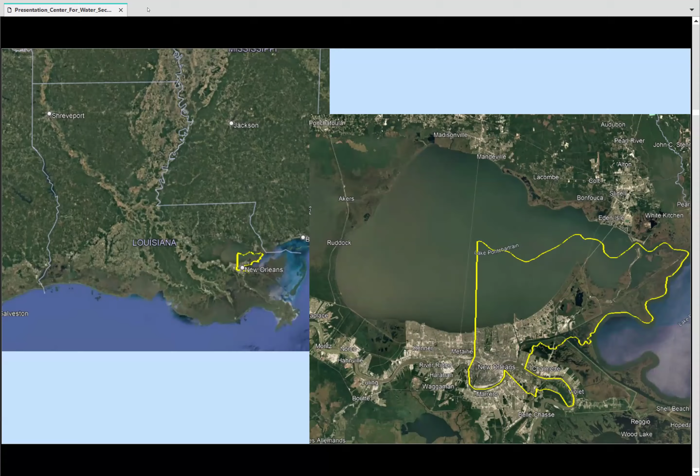The regional watershed that we focus on and contribute to is the Lake Pontchartrain Basin, seen here. I specify that we contribute to it because we don't receive much from it, as the hurricane protection system that the Army Corps of Engineers constructed after Katrina completely levees the greater New Orleans area from receiving waters, as shown here.

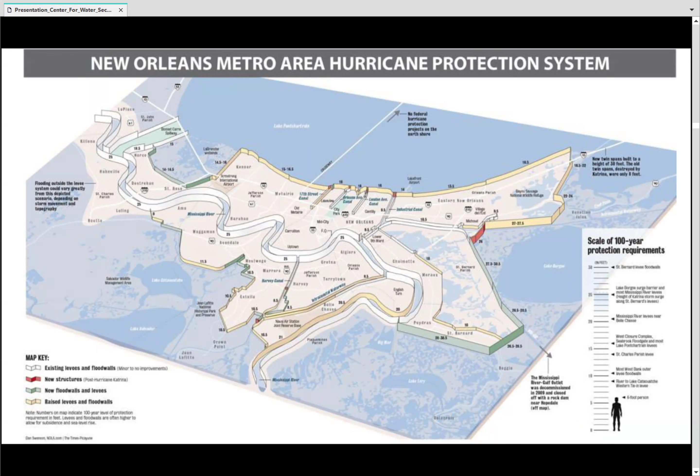Let's back up for a second and talk about how we got here. For thousands of years prior to and during the initial years of European settlement, several Native American tribes lived along the areas of high ground on the natural levees of the river, and also along the geological ridges of the distributaries.

In 1718, the French built a permanent settlement on the high ground adjacent to the Mississippi River, only 14 feet above sea level. As a result, the city was subject to flooding from the Mississippi River, from the lake, and also just rain in general.

This is a comparison—that red rectangle is the French Quarter, as we call it, referring to that same 4 by 11 block initial settlement, and this is how it looks compared to the current built environment.

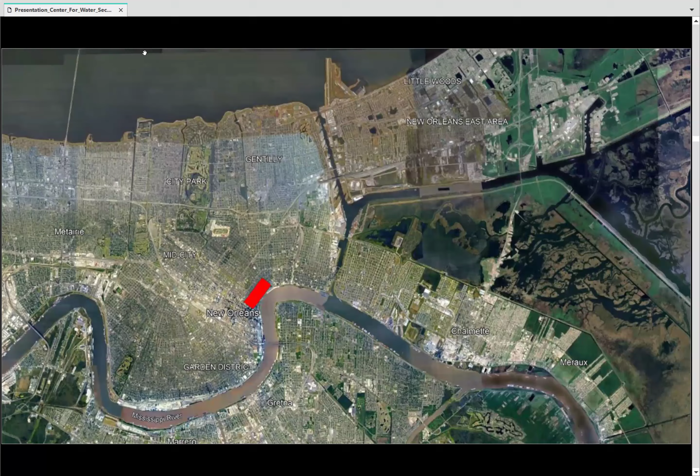An 1890 map of New Orleans from an LSU professor compares where they had settled, only about 150 years after that first settlement. You'll see that they were still just following what the Native Americans did, following that high ground where they could, to make a life for themselves.

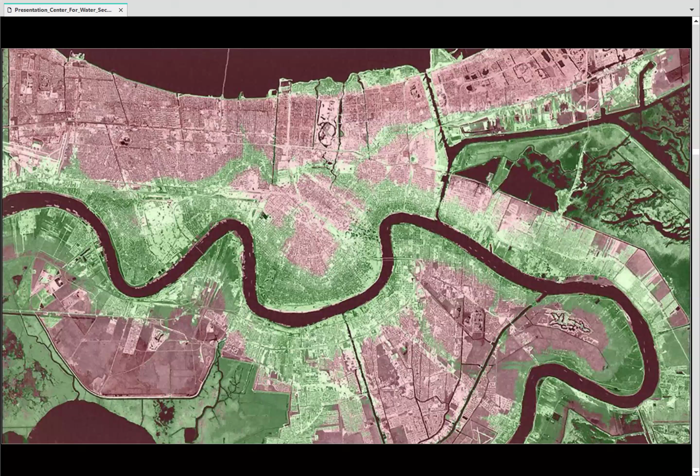This is an exaggerated cross section that shows how the elevation of the city has settled. The river is naturally higher than the lake to the north, which is why all of our canals lead to the lake in the north. This graphic was created a few years ago when the river was high and we were expecting a tropical storm, but I use this to show where the sea level line is compared to the populated areas of the city. That's why we're protected by these man-made levees, because we live in a bowl.

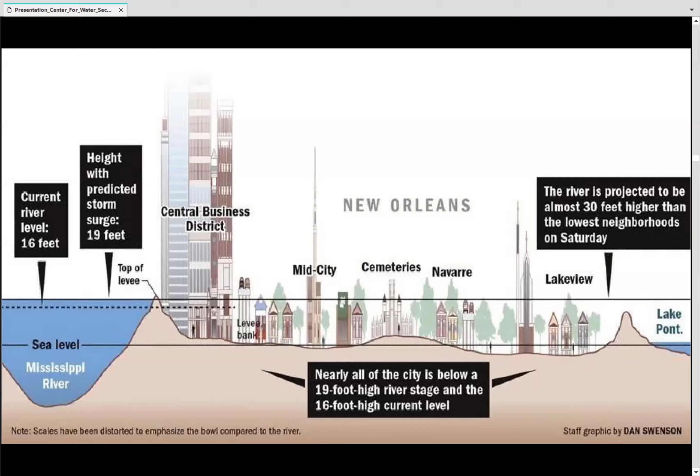Back in 1870, before all that, a surveyor from New Orleans warned that heavy storms are going to push that storm surge back from the lake up the canals into the city, because we have no way to stop them now that we've opened up these passageways.

They created a master drainage plan in 1896 and created the Sewerage and Water Board utility. In 1899, they hired a engineering graduate who created the pumps still used today. His name is Baldwin Wood. It's a wood screw pump. They installed 11 of them in 1915 for a total cost of $159,000, which would be about $5 million today, and they're still in use.

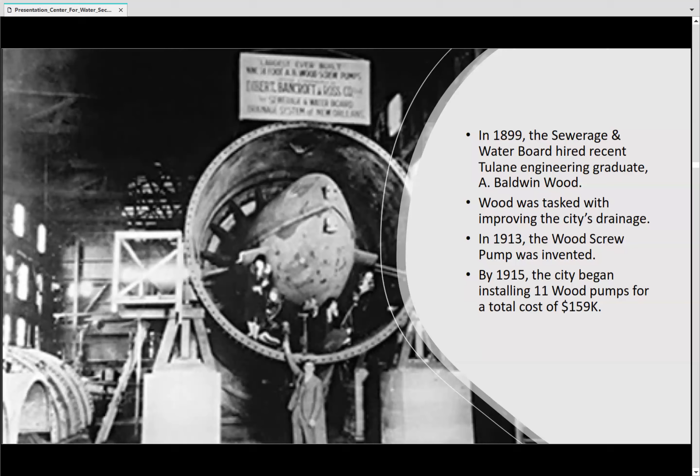These pumps are pretty simple. They use a powerful siphon action to lift the water into the drainage canals, where it flows by gravity further on to Lake Pontchartrain. So it's really just a straw with a fan in the middle. You need to have both sides submerged to make it work, and it keeps going until the water gets too low.

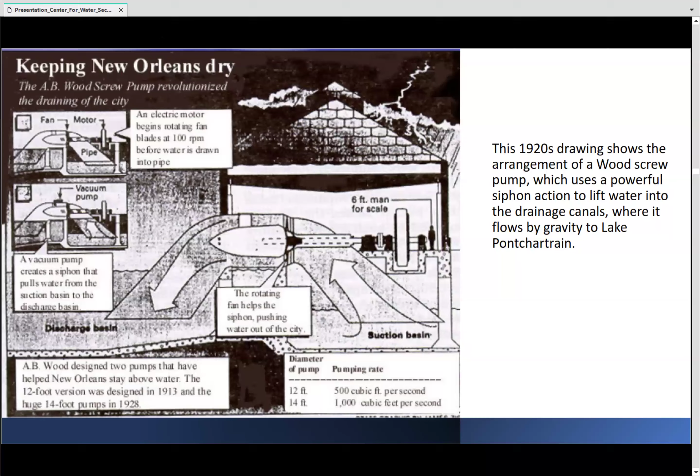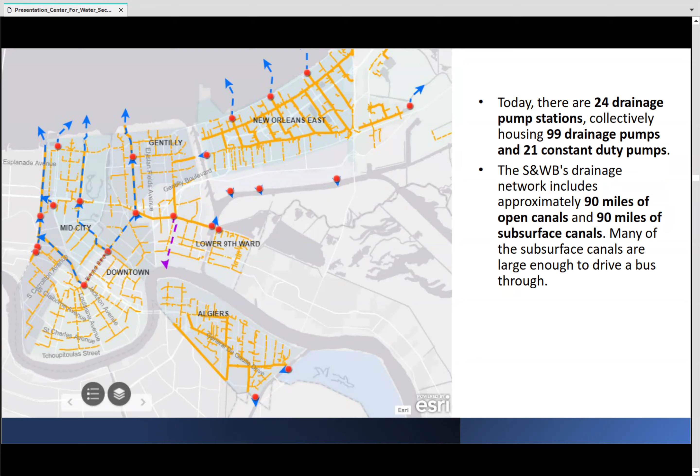Today, there are 24 drainage pump stations collectively housing 99 of those pumps. Our network includes 90 miles of open canals and 90 miles of subsurface canals, many of which are large enough to drive a bus through.

Now that we have a base understanding of how we engineered gray infrastructure to inhabit New Orleans, let's talk about nature-based solutions or approaches to stormwater management. Green infrastructure is an approach to stormwater management that mimics nature by soaking up and storing water using vegetation, soils, and natural processes to create a healthier urban environment. We know we need to work with nature, not against it, to live with water.

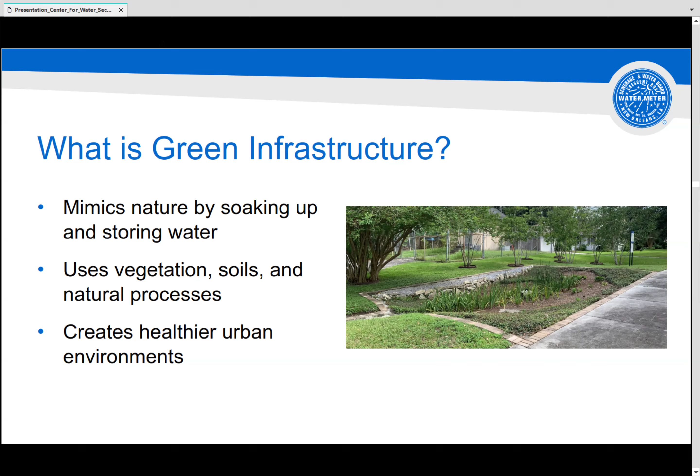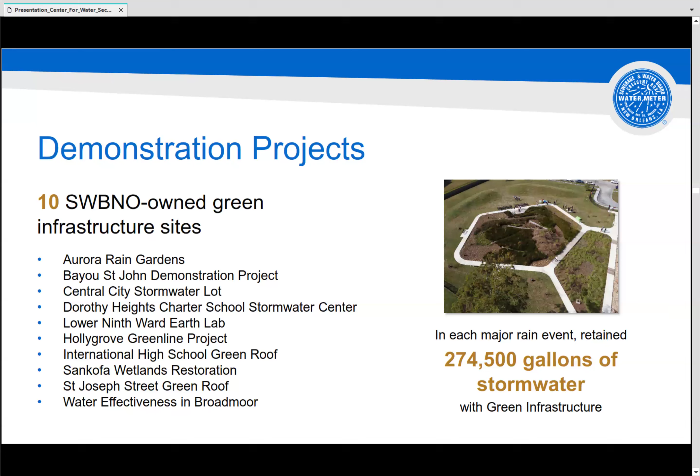Along with the city—we're separate from the city as the water utility—we've been funding green infrastructure projects in flood-prone areas. With the amount of rain we get, we will always need canals and pumps, but green infrastructure is an important piece of the puzzle.

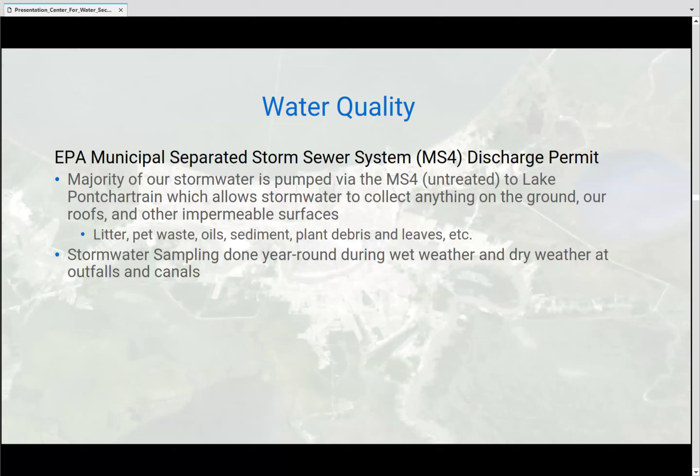One of the key components of why we care about green infrastructure is improving our water quality, as we are the holder of our EPA MS4 stormwater permit. This is a major problem in New Orleans. We are unable to treat our stormwater through our sewer system—they're completely separate systems. We get on average 68 inches of water per year, which would completely overwhelm our sewer system. But by using green infrastructure and retaining rainfall where it lands, it allows us to naturally reduce flooding and improve the water quality at the same time for our surrounding water bodies.

Okay, the real reason I'm presenting: one of the most successful ways to implement decentralized green infrastructure where it is most needed, regardless if it resides on private or public property, is to support the work of our community-based organizations that are already doing it. CBOs in New Orleans run deep, and they are fiercely passionate about the city and their neighborhoods. They know every puddle and how the water flows or doesn't flow.

Two CBOs that sought out relationships with our water utility are Healthy Community Services and Groundwork New Orleans. Dr. Angela Chalk with HCS forged a partnership with Sewerage and Water Board in 2022, with backing of a grant from the River Network, to build trust between utilities and CBOs.

That work included tree planting with Groundwork, trash boom installation with Osprey in one of our canals in this area, and also outreach in the community.

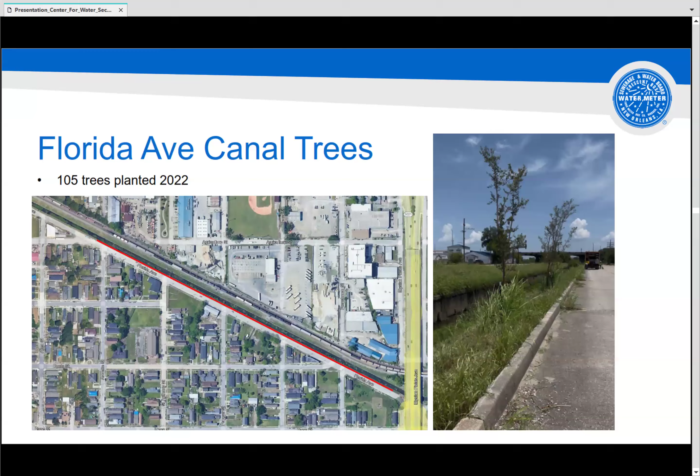Building on our work, I submitted an application to the Green Infrastructure Leadership Exchange for their re-grant in 2023, to continue that work with the same parties in the same areas.

Halfway through our grant—this is the amount of trees we got planted by that point—a rogue employee of my support services crew had mowed down 100 of the trees Angela and I had planted three years prior, out of maintenance frustration. The area in question is 2,000 linear feet on a 10-foot wide, steep-slope canal bank, which is classically maintained with an arm mower on a tractor. We realized we had focused our outreach on the community and skipped over a critical group: our own staff.

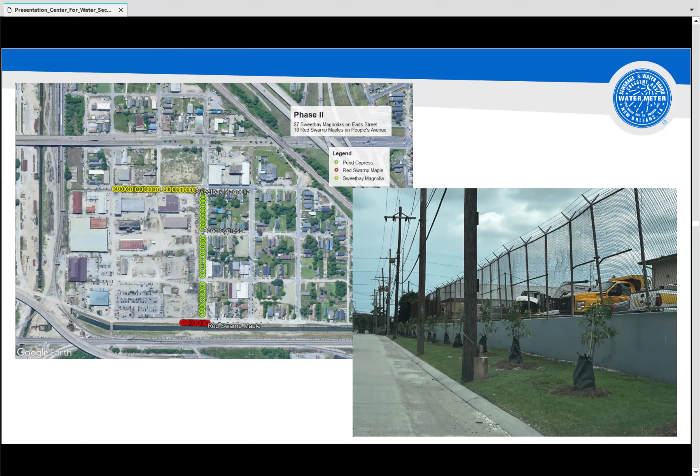Dr. Chalk learned of the event as it was happening because she lives in that neighborhood. A distraught neighbor sounded an alarm, called and ran over to her house. The phone tree was quick, and the lead supervisor I communicate with regretfully confirmed that it was our employee who had cut down those trees.

Dr. Chalk had many avenues available to her in that moment. The media and the community hold little grace for our water utility and would have loved to blow up that story. But instead, she called the people to action who could make a meaningful change, and leveraged the catastrophe into new opportunities. She did this because of the relationship we had built personally, and the wisdom that public health was at the root of this.

Within a week—this happened on a Monday—by Friday she had brought 6 agencies together in person to acknowledge the situation and present next steps: tree training for employees, policies, and replanting with a low-maintenance solution, making sure we're learning from our own outreach as well.

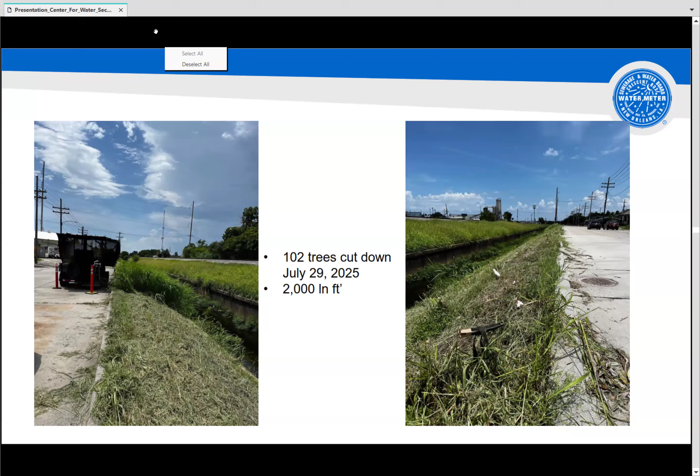Next slide. I reached out to Barbara right after that with a request to use the remaining grant funds to pursue the current needs, and I was met with an easy yes: document it.

We'll present it multiple times. We'll learn from it. To date, we've trained 40 employees and are planning to capture 200 more from our biggest department next month. The training is a combination of understanding how the environment affects public health, the importance of urban

trees within that, how to plant them, how to prune them, how to dig around them, as well as stormwater BMPs, which are important during all of that work.

Next slide. The effort brings together the city's Parks and Parkways Department, our Environmental Affairs Department, and Healthy Community Services to present a well-rounded training that hopes to educate instead of reprimand. It has been well received, and all parties have learned multitudes about each other at each training, including ourselves.

Next slide. So next steps are to coordinate a prescribed burn training, which has gained traction among urban organizations that would like to pursue it, but has been difficult to find a trainer for because much of the state isn't lower marshland,

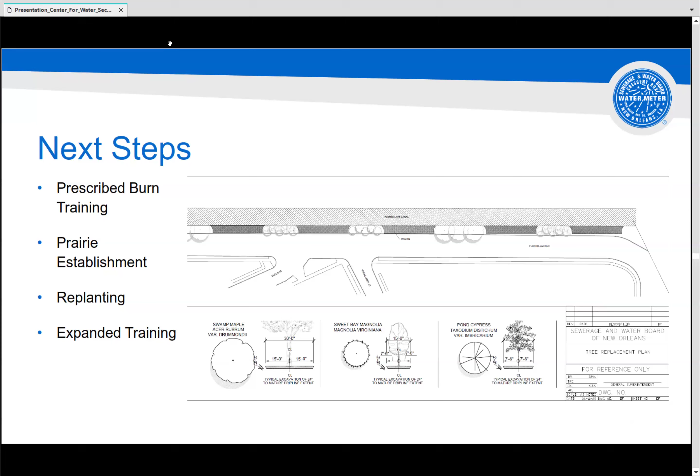That's all I got. Thank you.

Thank you, Grace. Next, I'll turn to Justin Reynolds from the city of Minneapolis.

Thanks, Barbara. Good afternoon, everyone. My name is Justin Reynolds, and I am the Green Infrastructure Coordinator at the City of Minneapolis.

And I'll be talking a little bit about how Minneapolis utilizes GSI to advance sustainability and what that looks like whenever we're implementing GSI on our public works projects.

Just a little about me. I've just been at the city of Minneapolis for a couple of years. And before that, I was doing consulting work as a civil engineer, doing a lot of green infrastructure work on the East Coast, in Philadelphia and New York City.

And yeah, originally from Kentucky, so I was in the Mississippi River Watershed, moved out of it for a little bit and decided to come back. Next slide.

So just to talk a little bit about why GSI matters in Minneapolis, we've had a pretty big increase in the amount of GSI that we've been implementing over the past few years, mostly as a result of policies that

support sustainability and climate resiliency. So there are a few policies that I wanted to highlight, and I'm going to go into a little more

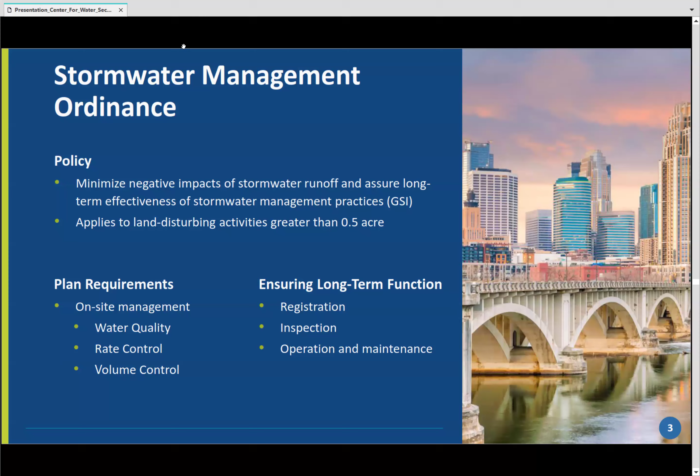So then these other two guiding policies, we've got Minneapolis 2040 and our transportation action plan. Minneapolis 2040 went into effect in January of 2020. I just wanted to mention that we have a few policies within there that support sustainability, including climate resilient communities, sustainable water system management, stormwater management, and integration of water management into development.

And then our transportation action plan went into effect December of 2020. This action plan guides a lot of the work that our transportation divisions within Public Works do. In this action plan, they've outlined a few design strategies for those projects, one being green the streets. So especially for projects that are required to meet our stormwater management ordinance, our transportation planners and engineers are very supportive of utilizing GSI to meet those multiple goals that they have.

So just as an example, they have a couple of actions in there. First one being build and maintain stormwater infrastructure into streets using features such as vegetation and bioswales to reduce runoff and treat water prior to entering waterways. Another one is adding greening elements to streetscapes to support the comfort and pleasure of people using the streets, as bikeway protection where appropriate, around transit stops and stations, and in high volume pedestrian areas.

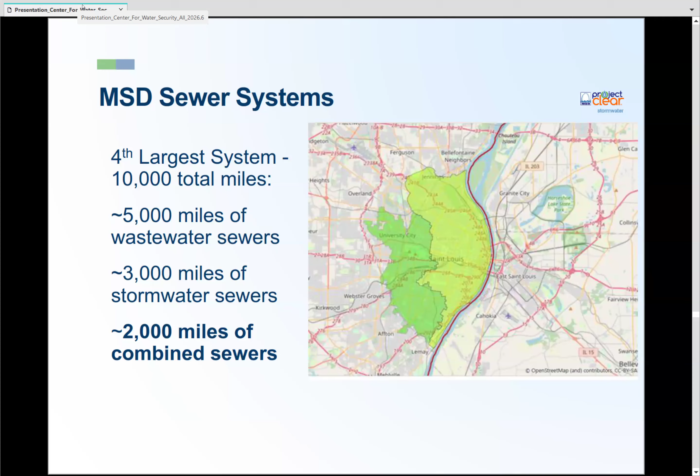Our funding comes from a consent decree to manage sanitary and combined sewer overflow. I showed the combined sewer area, and in case you're not familiar with what a combined sewer overflow is, in those older regions of the city, there was one sewer pipe that mostly conveyed the wastewater, but when it storms too much, it overflows, fills the capacity, and then breaks over that dam and flows into the Mississippi River. So we're trying to reduce that as much as possible through tunnels and green infrastructure.

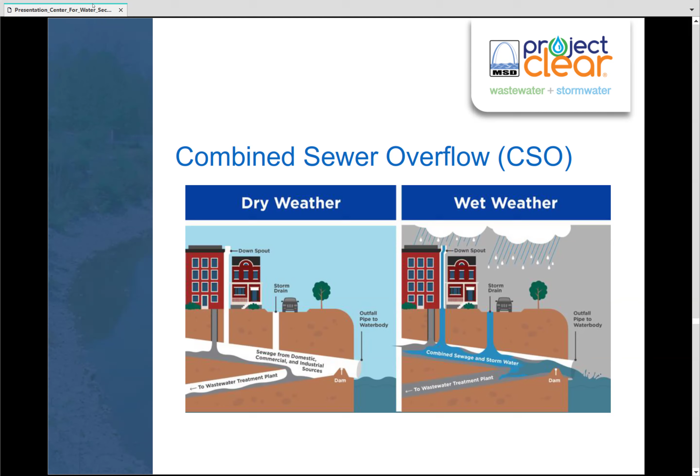Around 2011 is when we signed our consent decree with the EPA to reduce these overflows. They talked about investing $6 billion. At first they were just focusing on the Mississippi watershed combined sewer area, and it was agreed that we would spend $100 million of that on green infrastructure. Then in 2019, they also added the River Des Peres watershed. This is all water quality based and CSO reduction based. So now we have a $125 million budget to spend by the end of 2034 on green infrastructure.

At the beginning of the project, MSD built about 14 rain gardens and bioretention basins on vacant property that we could find within the city of St. Louis. But then it moved to more reimbursement based on private property. By the end of 2034, the total goal is to reduce the gallons going into the Mississippi by no less than 107 million gallons.

And then we also have our tunnel projects that will also capture more millions and billions of gallons. Okay, next slide, please.

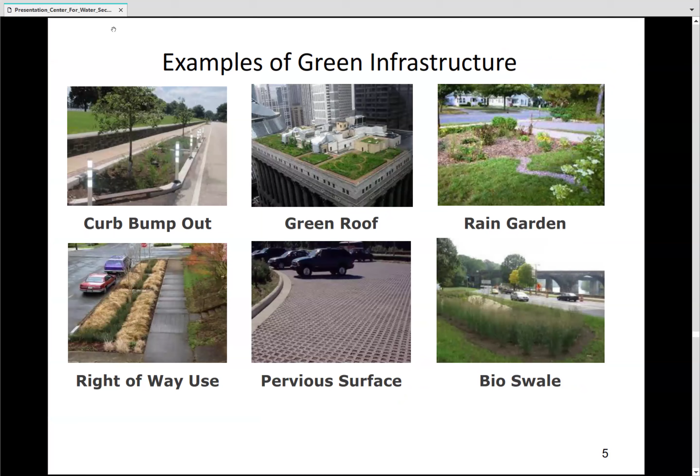So we already went through a lot of examples, but here's the slide that I usually use, examples of green infrastructure. Mostly we see rain gardens. Our grant does provide for green roofs or pervious surfaces or those curb bump outs that Justin showed as well.

One question that we get a lot is we cover wetlands and forest and stream restoration. Those I would consider green stormwater assets, but this grant doesn't just cover wetlands. It has to provide extra storage in those storm events. And then trees are helpful for managing stormwater, but our grant won't pay for just trees. It has to be in a bioretention basin or along with some other flood and landscaping management.

New Orleans is probably more porous, but we have a lot of clay soil in Missouri. So this is just going to depend on your city and organization and also your geology. But we always require a perforated under drain in our bioretention basins and some gravel. So they'll dig out some of the clay and existing soil and put in these gravel beds, bioretention soil, and then the under drain. That way you're not getting standing water or pooling or causing any mosquito problems. You want that water to fill the bioretention basin, store it, and eventually flow out if it has to, or drain within 2 days. This is more of the engineering side of it, but just think about that for your city. You'll have different design standards most likely.

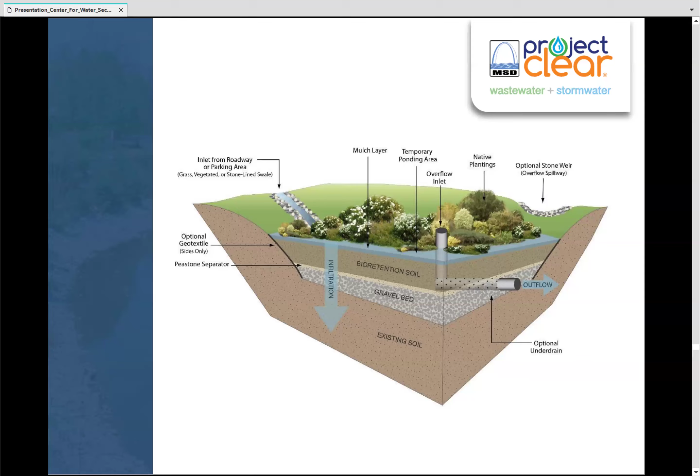So we also offer two types of large grants. Development review is kind of as Justin mentioned as well. We do have requirements on developers. If they develop over an acre, they need to put in some sort of stormwater management, and that applies all throughout the MSD service area. But for the grants in the CSO region, we can reimburse for bioretention, and that's up to $180,000 per acre treated. So if someone's putting in a 1 acre parking lot and that all drains into a rain garden and is stored there, that can be reimbursed for $180,000.

And then we also have our annual call grants in October, and that is more competitive. We've seen some applications and work with Greenprint partners on some of these and RFPs for some new technologies, or if it's a more expensive project, we will rank the applications that come in and provide some competitive grant funding.

Oh yeah, so we also provide small grants to homeowners. The slide used to make more sense because it had different dollar amounts per different watershed, but now they're all the same. We decided to make them all the same. So anywhere in the MSD service area, whether it's MS4, the separate system, or in the combined sewer system, people can apply for $4,000 to install a rain garden on their home, or also put in a rain barrel or permeable patio, or $10,000 for institutions. We've seen some more churches or nonprofits go for that grant if they don't want to pay for the engineering fees and the review process for the larger grants, for the developer level grants.

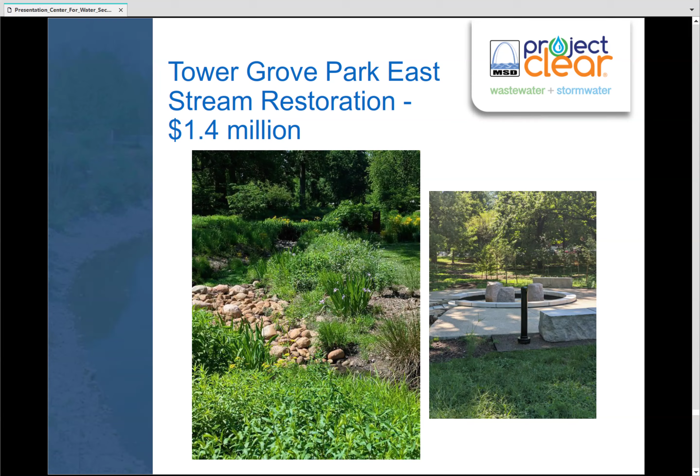This is in the same park. They do a lot of downstream work. So when they added these new basketball courts, they were required to manage the runoff from the basketball courts. So some rain gardens were also put in next to 2 new basketball courts. I went out there again this fall - the dandelions had kind of taken over. So again, parks are usually great to partner with because they do have good maintenance staff, and they'll just have to go in there and maybe do some weeding soon and add new plants.

Maintenance is huge, and people can pay to have their name on a paver, which helps upkeep this little pocket park and basketball space. This was pretty expensive per acre, maybe a quarter acre lot, and a lot of money went into this, but I think it was very beneficial for the community.

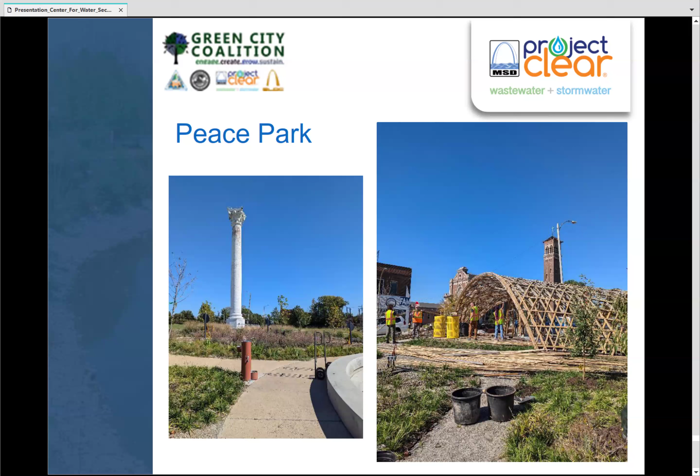Next slide, and I think that's it. So these are some of our partners with the Green City Coalition - it's us, Missouri Department of Conservation, the Development Corporation, and City of St. Louis. Do I have other slides? Oh yep, that's all my slides.

Perfect, thank you. All right, well Alexandra, I think we did what you asked us to do in the time that you asked us to do it, so give us a gold star. That's very easy to do, Barbara. This has been absolutely fantastic. I've been taking lots of notes because it's super, super fascinating.

So I do see there's 2 questions in the Q&A. I'm going to take just a second to ask one question. It sounds like from all the different examples provided, there's been a variety of partners - private sector, community groups, nonprofits - that have been part of these projects. I'm curious, how do these projects typically come about? Do the community groups come to you, or do you go to the community groups? And once you have one project done, is that a model for other communities to follow in future projects? This is a question to all the panelists.

I can go first. We see it both ways. We do see community groups applying for the grants, and I've also been doing a lot of outreach for the parks. Like I mentioned, we have a lot more acreage to cover in River Des Peres, so I'm trying to find park partners or any entities that want to implement these, and we'll help them with the grant funding. So both ways.